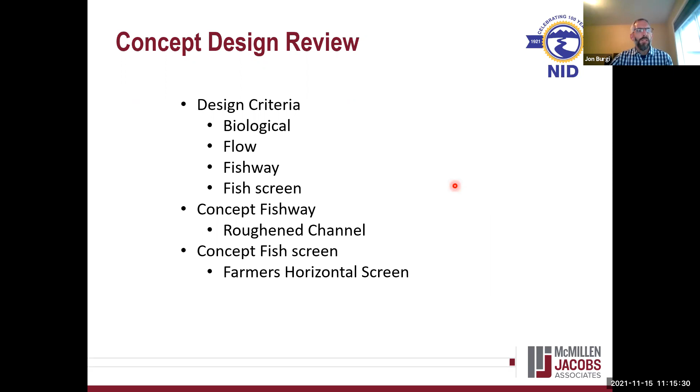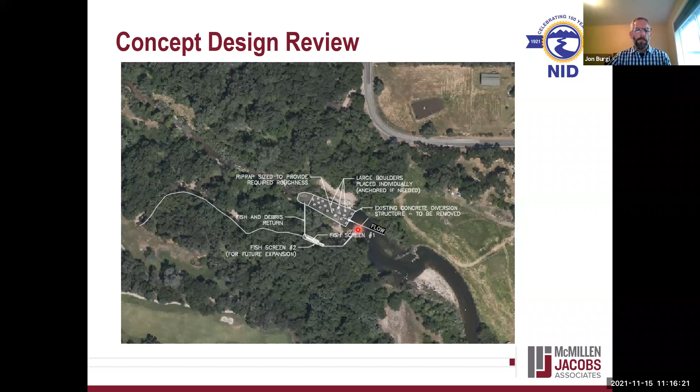And so we'll be looking at removing the existing concrete diversion dam and replacing it with what's called a roughened channel, or a rough rock ramp, or a nature-like fishway. Goes by a lot of different names. So that would be coming right in here. And then the fish screen facility we're looking at would be located out here in the canal, not in the ravine. So just to quickly orient yourself with all of that.

Just a few of the criteria. Some of the biological criteria we're looking at is the species of concern, which I'm sure many of you know already: Central Valley Fall Run Chinook salmon and California Central Valley steelhead are the two main ones. And then the Pacific lamprey is also a California species of special concern. So those are really the three main species we're looking at as we try to come up with solutions that work. Here's some of the migration timing we put together for all three species, which drops down to this fish passage window at the bottom from early October to late June.

Quickly on Auburn Ravine flow criteria. Really the flow criteria we're using are based on the analysis of the stream gauge located down by Lincoln Boulevard. Is that right? I'm trying to catch up. Previously known as the downstream of Highway 65 gauging station. When we look at the data there from 1995 to 2021, we come up with these exceedance flows. These define a low flow at the 95% exceedance of 13 CFS and a high flow at 5% exceedance of 172.5 CFS.

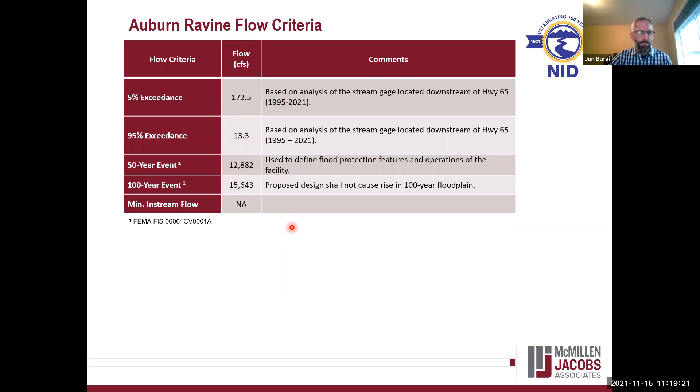As far as the canal flows, the timing on that is generally from April 1st to October 31st. And again, looking at flows from 2011 to 2021, minimum flow is around 3 CFS and maximum flow is around 9 CFS. So those really create the design criteria as we look at screening. And certainly the headgate design and the screen are going to need to deal with debris management, with sediment, with the fish management. But those are all things that need to be handled there.

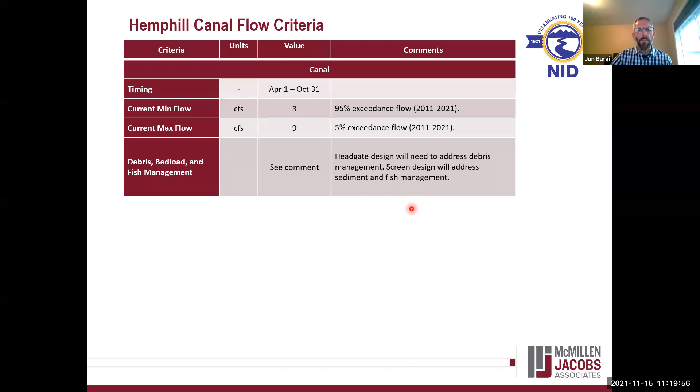Some of the fishway criteria. So for this roughened channel, some of the criteria that we're working from is really based off of a lot of the NMFS criteria from their 2011 criteria book. They try to keep the length of these roughened channels below 150 feet, so keep them shorter than that. We try to keep the slope lower than 6%. We try to maintain at least a foot of flow depth in that low channel and really in all flow conditions.

This transport velocity is something that we try to keep lower to where the fish can swim through that well. And so it really will be affected by material placement. And as we look at the design a little bit more, there will be a lot of different types of material placed in different places in this roughened channel that will provide areas of refuge and also provide areas of quicker moving water. So there will be a lot of variety in that.

One of the challenges that we have is minimizing subsurface flow, because if you can imagine you put a bunch of big rocks out in a river, all the water is going to go down to the bottom, and that's not going to be helpful for fish. And so there's really a lot of thought that goes into what that fill material looks like, so that it's rough enough to create the roughness we need, but also that it's got enough smaller material in it to keep the water on the surface.

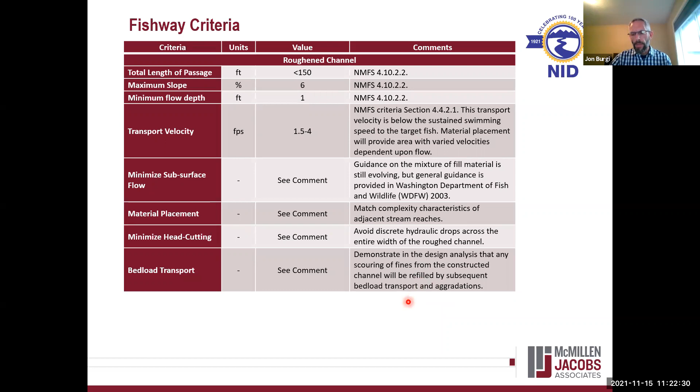We'll need to minimize head cutting. So both on the upstream and the downstream end of this roughened channel, we'll put controls that define those 2 points so that they're not moving. And then bed load transport. We know that it's a natural stream, that there's sediments moving downstream. And so how do those filter into, through, on, over this roughened channel? Those will all be things that we'll be looking at as we build that hydraulic model and study that a little bit more.

Just some of the fish screen criteria. We'll end up looking through screen material. We'll be looking at diversion shut off.

You guys are seeing, you guys see that right there, don't you? How do I move that? Oh, I just caught up with that.

So the screen material will be something we'll be looking at, making sure there's the ability to shut off the diversion if something goes wrong in the system, the ability to remove sediment, because whatever we do at the trash rack, there'll still be sediment that will come into the canal. These screen approach velocities are important to make sure that fish don't get impinged on the screen or stuck there. That goes right along with the sweeping velocity of trying to make sure that flow is moving over the surface of the screen quickly enough to keep things moving on downstream.

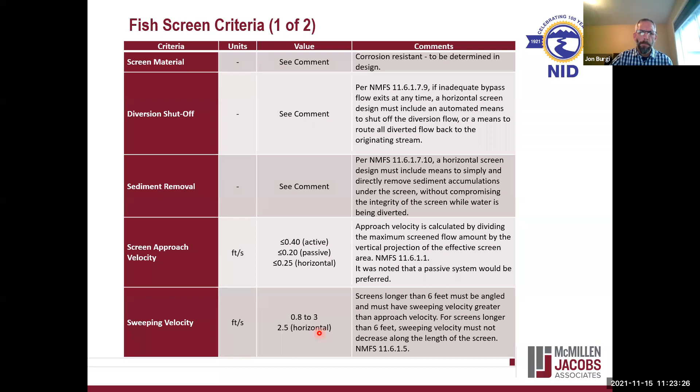And some of these criteria are for other possible screens that we could have looked at, like drums, inclined screen faces, some of those things that really won't apply to us with looking at this option right here. But then these openings will be important. We've got these criteria to make sure the screen material has the right openings. So there's those things.

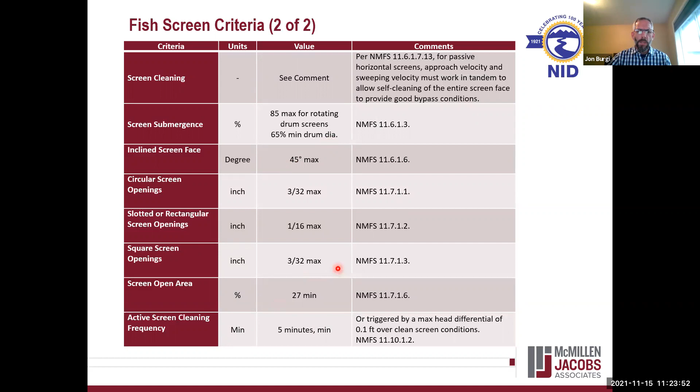Natural streams have movement after flood events, and so this one likewise will probably have some movement after flood events, and so it'll be an ongoing O&M for the district, for NID to keep an eye on that and make sure after floods come through, if things have moved significantly, if velocities need to be measured again, just working with CDFW to make sure that it's still meeting the criteria.

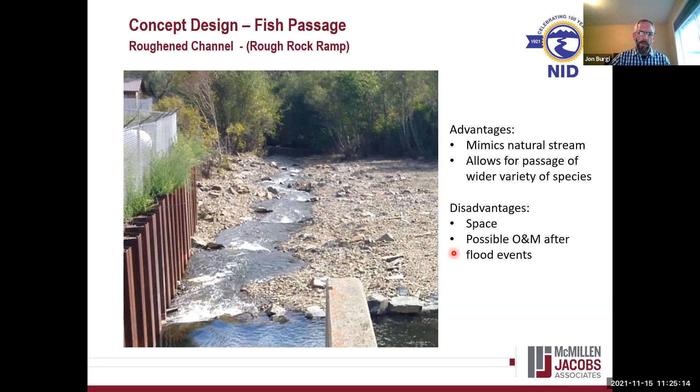On the leading edge of this, I guess we'll see this in the profile also, but we'll probably be putting in like a sheet pile here on the leading edge to really define that crest shape and that crest location to make sure that whatever water flows over there, it's not changing what's happening at the crest. So then there'd be riprap, rocks that would go in that are sized to the required roughness that we need for the slope.

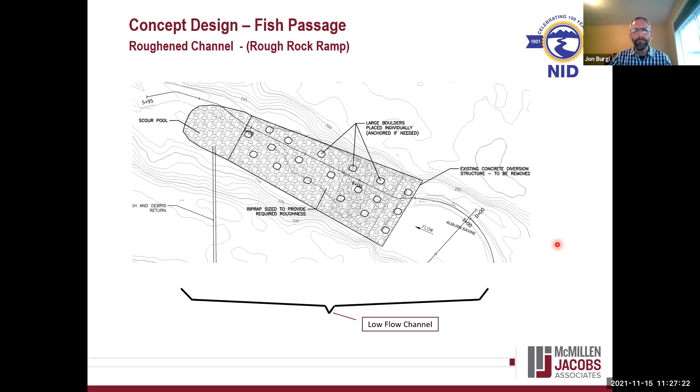But we believe that with 150 feet of run in our roughened channel, and right now we've got a slope of about 4.5%, we meet the criteria, and we think that this is a very workable solution. By keeping that crest where it's at, it really helps with the concern over sediments that have collected behind the dam, the existing structure, so those will be able to remain.

I believe it really helps with the concerns over bank stability upstream, that if we were to lower this crest by 2 feet, that creates potential issues upstream with those banks that are already seeing some erosion happening. And so by keeping that there, it helps those two things. It also limits the amount of canal that might need to get regraded.

And so, we're still losing the 3 feet of flashboards that were up here. So we're losing some water surface elevation, so we might have to do some canal regrading, but by keeping that crest here, we won't have to do nearly as much. Here I've also just kind of shown where those low flows and high flows, what that might look like coming down through here.

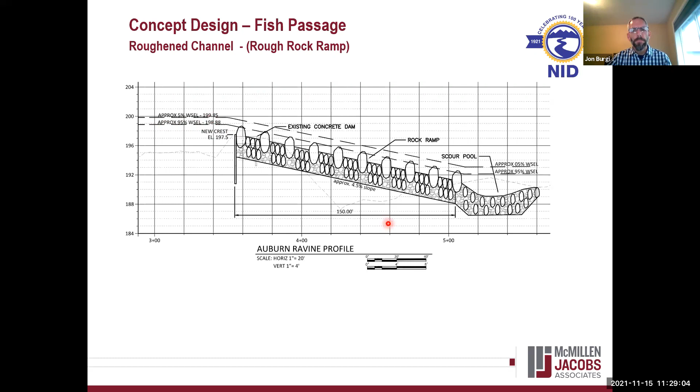So we would keep like a foot of water over the top of that screen to allow fish to continue moving on down. And then the water goes over the weir into this attenuation bay, and then flows out into the canal. As the water comes along this section over the screen, maybe you can see that it gets narrower, that the wall pushes the flow together, which really tries to keep the sweeping velocity high as it moves on down here. So that just keeps everything moving on down and allows the water to come out through the screen.

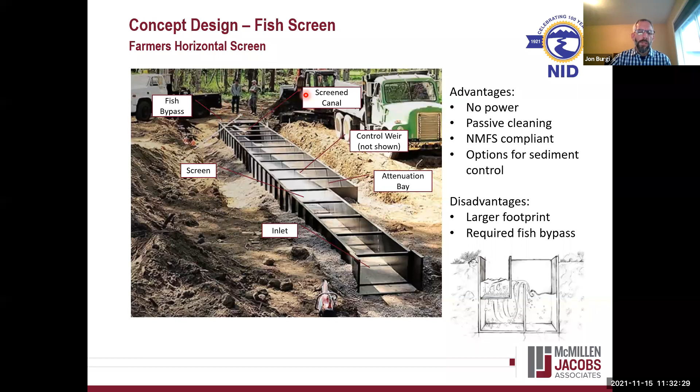But in the future, if the district wanted to expand or it wanted to put more water down the canal for whatever reason, there would be the option to easily just put in another screen, connect it in, and they would be able to just increase their flow that way.

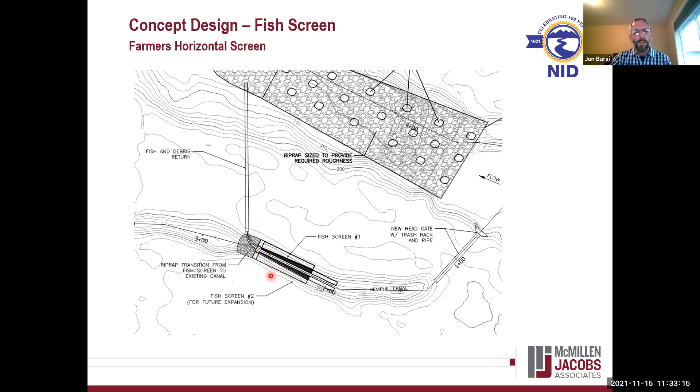And it is likely we'll have to regrade the canal some, but like I mentioned, we're just not sure how much. That'll depend a little bit as we dig deeper into the hydraulics. And it's possible that this whole head gate fish screen setup needs to move down a little bit more in order to get enough water and to get the flows working right through the whole system. So that'll be one of the things that we'll be digging into here in the next few weeks, month or so, as we move toward 50%.

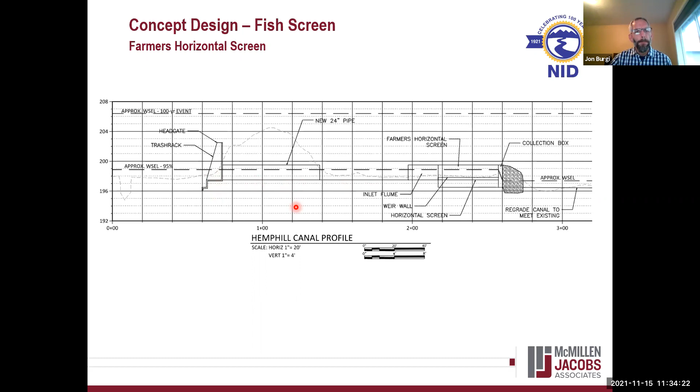So that's really kind of the walkthrough I wanted to do on that. And then, if there's just any questions, I'd be happy to take a swing at them. And I've also got Kevin here online, one of our engineers that has worked with these things more than I have, to bring his experience as well. So I guess, Tanya, do you want to be in charge of questions? Yeah, we can go ahead with questions on the design review at this point. The best way is probably to use the raise your hand function, and then I will ask you to unmute. And if you guys want a moment to digest everything, we can move on to permitting too. Okay, Jim.

Yeah, Jim Hoffler here. I had a question about the bypass. Where the bypass approaches the creek and actually goes into the creek, are there provisions there to make sure the fish aren't going to have a drop and bang their little heads on the rocks? Yeah, so there's criteria of how much of a drop that needs to be to make sure it's not too much or not too little. And so that will definitely be one of the things we'll be looking at. And I think there's plenty of drop from the back of the fish screen back into the ravine to give us kind of leeway of how that works. But yes, we are aware that we need to be careful of that and make sure we do that correctly.

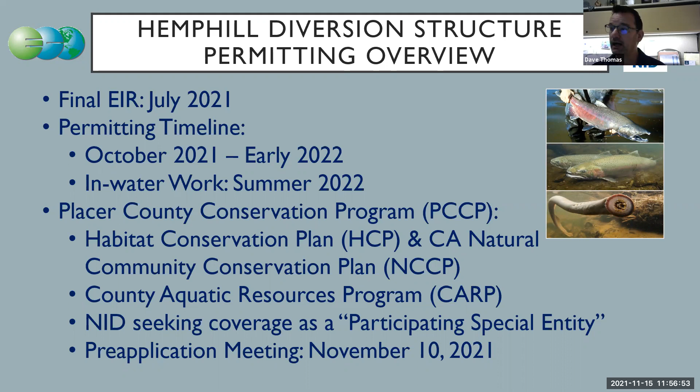Right now, I think our biggest constraint as far as getting the permits done is really getting the design of the fish screen and the fish passage itself to a level where we can get the permits completed and into the agencies for review. Go to the next slide. There it goes. Okay. So the PCCP itself streamlines the permitting process for multiple permits.

The Clean Water Act Section 404, that will likely be done under a PGP 18, also provides coverage under the Clean Water Act for the Regional Water Quality Control Board, and provides take coverage for ESA listed fish under NMFS and U.S. Fish and Wildlife Service jurisdiction.

As John mentioned, we have covered species in the PCCP, and those are Central Valley steelhead and Central Valley fall-run Chinook salmon. Steelhead is a listed species under the Endangered Species Act, and the reach of Auburn Ravine where the dam is, is critical habitat for steelhead. And then the third species is a special concern species under California, and it's the Pacific lamprey.

So in addition to the PCCP, there are a couple of other additional permits that are required. One is the notice of intent for the Regional Water Quality Control Board to get the Clean Water Act coverage. And then also a CDFW lake and streambed alteration agreement is separate from the PCCP. So these are the permits that we are currently working on.

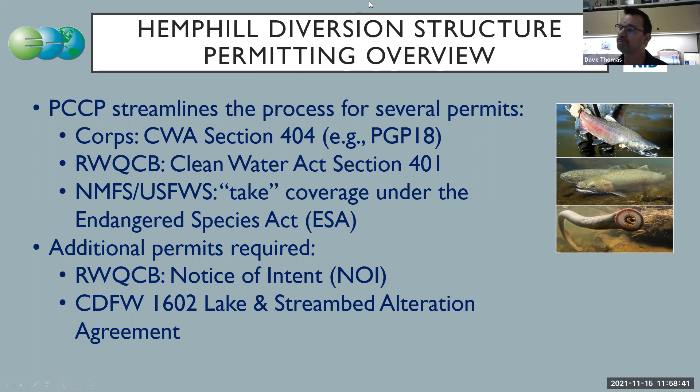And again, hoping to get these all completed probably early next year so that NID can get the contracts in place to get the work going next year and be done hopefully in early 2023. Any questions on that? Okay, thank you, Dave.

So just a really quick recap at this point. I'm hearing concerns about the farmer's screen. John and Kevin are going to get some information available, and we'll provide that information via email, as well as potentially putting it on our website. I think we'll do that so that everybody has access to it, and hopefully that will take care of some of the concerns regarding the farmer's screen usage on this particular project.

I haven't heard any concerns yet about the roughened rock ramp design itself. If there's anything that we should know about, please let us know that now, because we are looking to proceed with a 50% design, and if we're going to change course, we have to do that at this point to be able to meet our timeline. And so we really appreciate the efforts that you guys are putting in now to review what we have in terms of the design concept, so that we could move forward with our 50% drawings basically in a month.

I don't know if everybody got the agenda or not. We put that on our website, but we are looking at a 50% circulation to everyone mid-December, December 15th. So that's a pretty quick timeline here. So with that, I think Jean brought this up at our PCCP meeting, whether or not we'll be looking for written comments. If everybody can submit to us written comments by this Wednesday, the 17th, by the end of the day, that would be great. And we could move forward with our 50% plans.